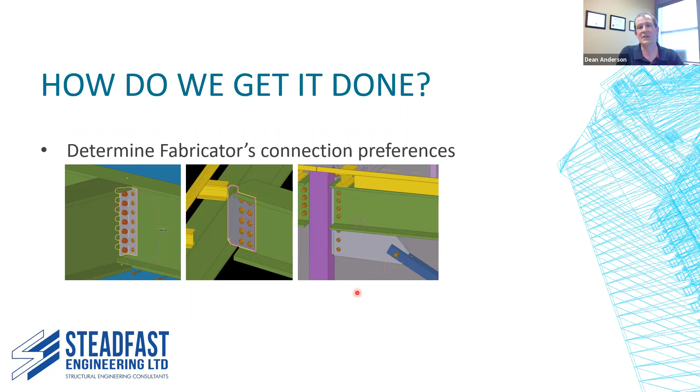They might not want to do that. They want to say, no, we don't want to weld in the field. We don't want to mess around with that. We want to maybe bolt it in the field. So they want to maybe do this connection where it's bolted.

So we talk to the fabricator, we figure out what they want. And then a lot of the time, we have to keep in mind what can actually be done with respect to the loading. If you're in an earthquake zone, if you're out in BC where earthquakes are a lot more prominent, you have to design the connections to resist those loads. This connection here that's welded would be much more suited to that type of situation.

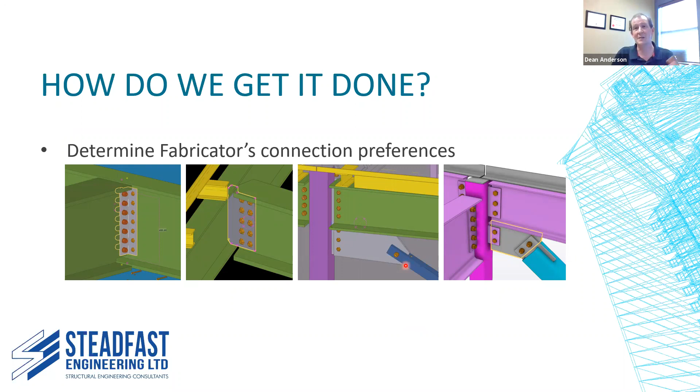So we have to balance all those things. We might have to go back to the fabricator and say, well, no, we can't really do this really small bolted connection. We have to make it a little bit bigger and beefier so that we can accommodate the loading. So we can have that back and forth to accommodate those sorts of things.

So then we design, we figure out what we have to design, we put it all together, and now we have to communicate that information to the detailer. Again, he's the one who's going to create that IKEA booklet, the assembly instructions for how the steel is made.

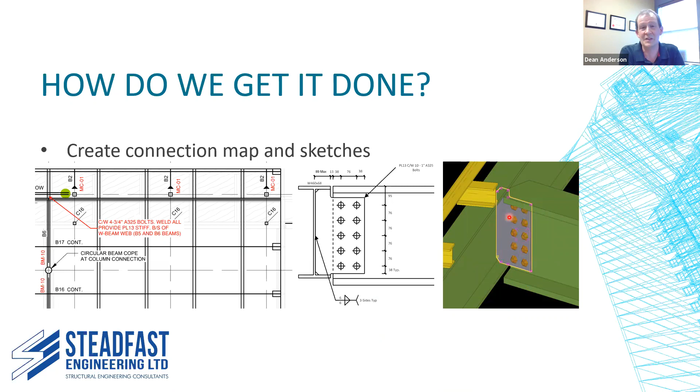He takes that onto the shop floor and he builds that piece. Then we go in and we've communicated to them our designs. They've created their model, they've created their two-dimensional shop drawings. And then we have to go back and make sure those drawings reflect the designs that we provided.

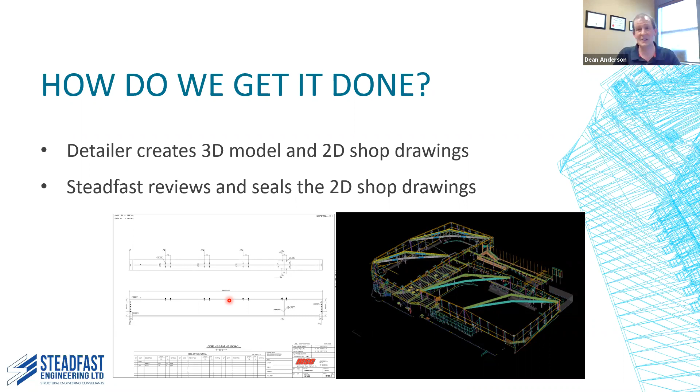So we go through and check all of these drawings. In the world where we have to take responsibility for our designs, these two-dimensional drawings are the things we sign and seal. We're saying that yes, these designs reflect what is designed according to code, what is safe. That's something Adam is going to talk about later, about how this may not be the most efficient way to do things, and hopefully there can be some improvement, but that's the way it's done right now. These two-dimensional drawings are kind of that legal document to say we designed this, and it's done according to code.

So now we're going to narrow down onto a particular connection. We were working on a project called the South Burnaby Ice Arena. This snapshot probably looks familiar from earlier, but this is a big zoom out of this project we were working on. To get an idea of scale, this is 2 hockey rinks along with seating, with bleachers on the side surrounding the rink. There's another one down over here with some other rooms and structure in between those 2 rinks. So that's the overall building.

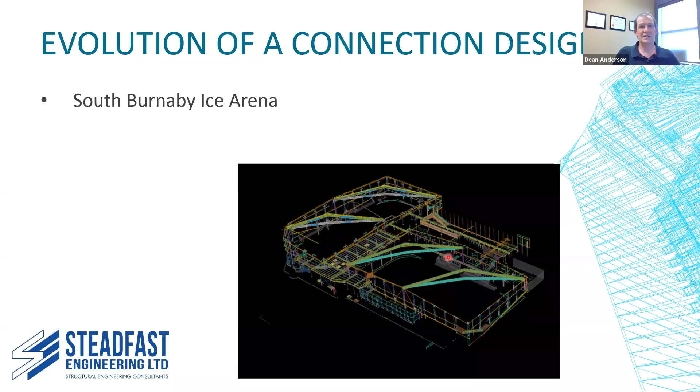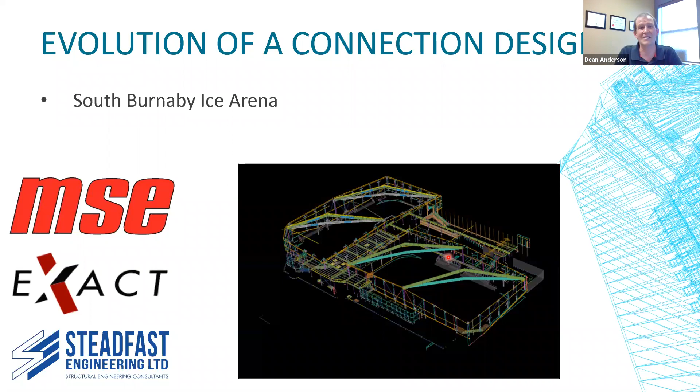We were working on this project with MSE, McDougall Steel Erectors, and they are the fabricator, the guys who are building the steel. They're located in Prince Edward Island. Exact Detailing is the detailer, located in Victoria with offices across Canada, their home office in Victoria. This really shows how the virtual world works and how we can work across the country to accomplish one project in one particular location. We're spanning across the whole width of Canada essentially in this one project, and it works really well. We have a lot of tools that can make this happen quite effectively.

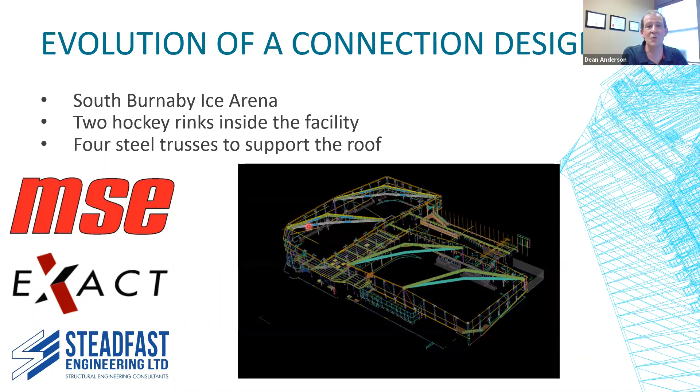So we've got 2 hockey rinks inside the facility, and what we're looking at is these triangular shapes here, 2 here and 2 down here. We're going to focus on one of these triangular shapes. Those are trusses. These trusses support the entire roof that clear spans over top of these rinks. They span diagonally, so they're extra long. And in between, hopefully I don't offend people at the steel center, is a wood structure. This is actually a hybrid steel wood structure, with a whole bunch of wood members spanning in between to make up the roof.

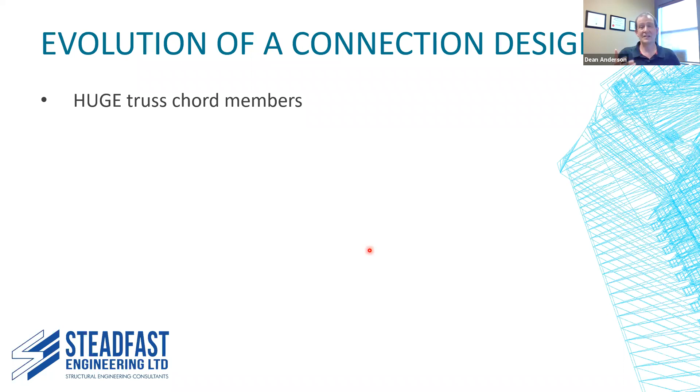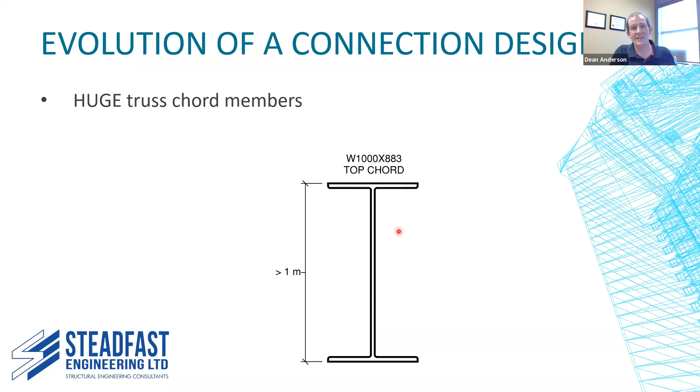So we're going to look at one of these trusses. Each member or each part of that truss is a huge chord member. These things span very far, so they're constructed from massive sections. The designation is a W1000 by 883 - meaning it's 1 meter tall, 1,000 millimeters, and weighs 883 kilograms per meter. It's quite large - to give an idea of scale, if you're a person standing beside this beam, it comes up probably roughly 2/3 up your body. So quite large, quite high.

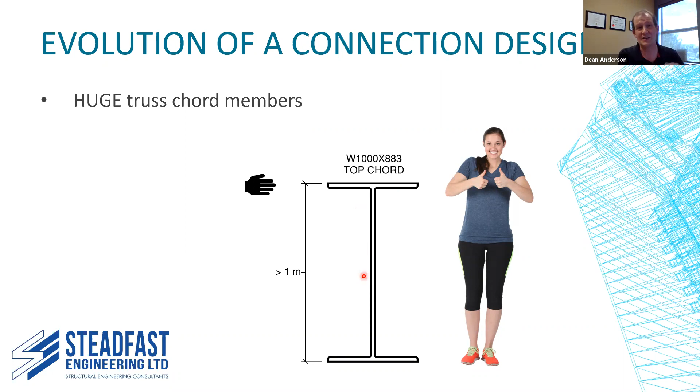If you look at one of the flanges - the horizontal parts of this wide flange shape - it's about 3 inches thick. If you hold up your hand and go from knuckle to knuckle, that's about 3 inches, that's how thick the steel is on the top and bottom flange. This web part here is about 2 inches. So it's a very thick, very heavy member that we had to deal with.

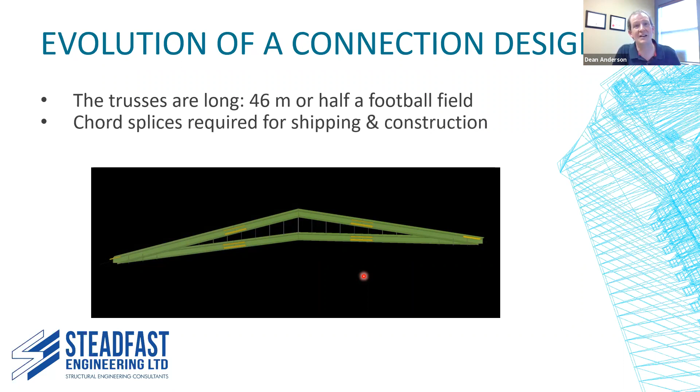How do you build this in your shop? How can you effectively put this together in your shop? You'd have to have a shop that's more than half a football field long just to accommodate that, so it's quite challenging. So what we figured is that you had to put splices in here. This is, again, talking with the fabricator about how we were going to do this.

So what we did was we figured that we needed to cut this truss into thirds. So we got 3 separate sections of truss. It's actually 4 because this top part is separate and that part is separate too. But we're basically cutting this truss into thirds, so we have to cut this.

So what we had to do was go back to the engineer of record. We have to say, okay, we want to cut this truss because it's too tough to get to site, too tough to actually put together. So give us the loads. We went back and forth a little bit with the engineer of record to come up with the best loads. Sometimes the tendency is to give really safe, really high loads. We had to go back and forth to try to get the best loads so we could design the best connection possible that's cost effective and can be built on site, can actually be accommodated.

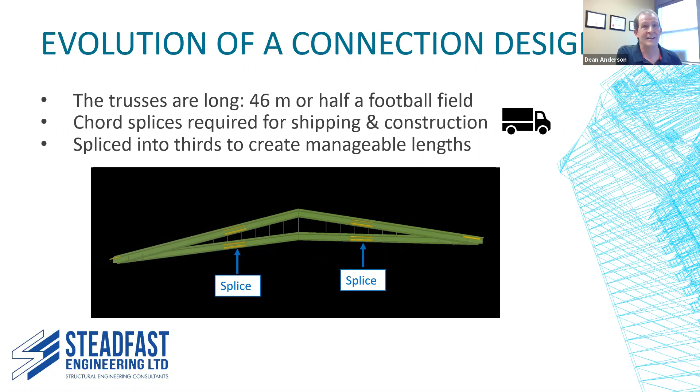So this is where we come in, this is where Steadfast comes in. There's a connection required at the splice. The engineers provided forces, we've got those, and these forces were actually quite large. We're looking at the bottom chord of a truss, so each truss consists of that 1 meter tall member.

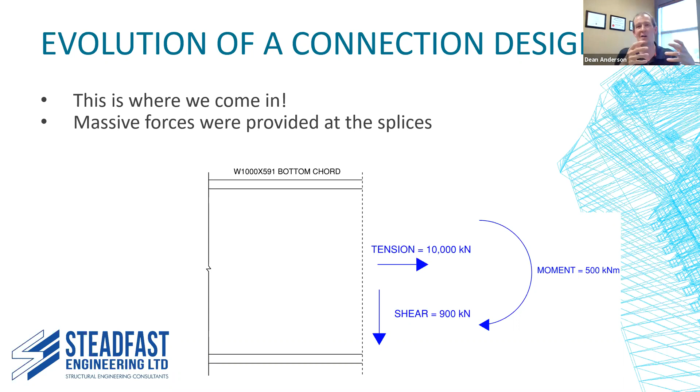Each truss had a tension load of 10,000 kilonewtons, a shear of 900 kilonewtons, and a moment of 500 kilonewton meters. To get a rough idea of how large that is, imagine 170 African bush elephants. That's roughly what 10,000 kilonewtons is. So if you were to hang 170 elephants off the end of this thing, that's how much force is coming through this truss. It's quite challenging to try to come up with a design that can accommodate these forces.

Again, we have to accommodate the loads, we have to accommodate the fabricator, we have to make sure it can be built on site, we have to make sure the architect is happy with the way it looks, and we have to balance all these things while trying to make this connection. So it's pretty challenging. At this point, I'm going to pass it over to Keenan. He was the guy that did most of the work on this particular connection, so he's going to discuss some of the first few designs that we worked on to try to figure out the best way to do this.

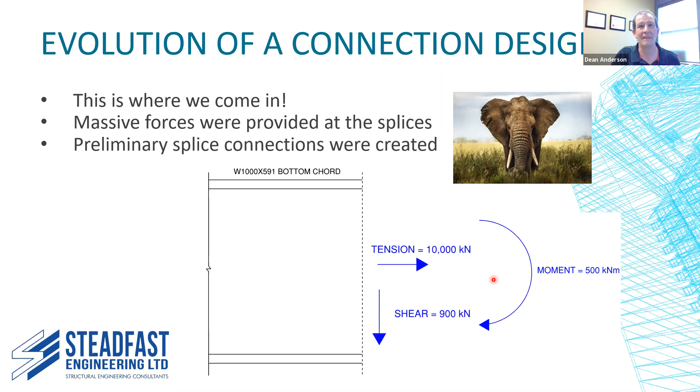Thanks, Dean. So now that we have these forces, we're tasked with the challenge of figuring out what can be done, what's possible here. These are massive loads that we're dealing with. So the first concept that we came up with was a flange plate connection.

In this configuration, we have plates on both sides of the flanges, as well as on both sides of the webs. The nice plus with this connection is that these plates are shipped loose to the site, and then they can be easily bolted up during construction. This is also great for the fabricator, because we don't have any welding involved here, not in the shop or in the field. So this is going to greatly reduce their labor costs.

One of the primary goals for the fabricator on this job was to avoid any field welding where possible. Field welding can be a challenging and costly process, as it's difficult to control the outdoor environment around the welder. So you end up with a higher risk of producing poor quality welds, which we don't want, and they don't want to have to rework those welds as a result. It's also more difficult for them to maneuver these pieces of the truss into place prior to welding on site, compared to doing this in the shop where all your cranes are accessible to you. So field welding could be done, but the erector wants to avoid this if we can.

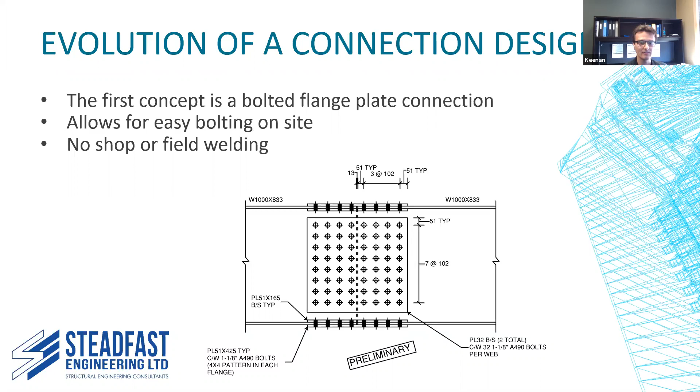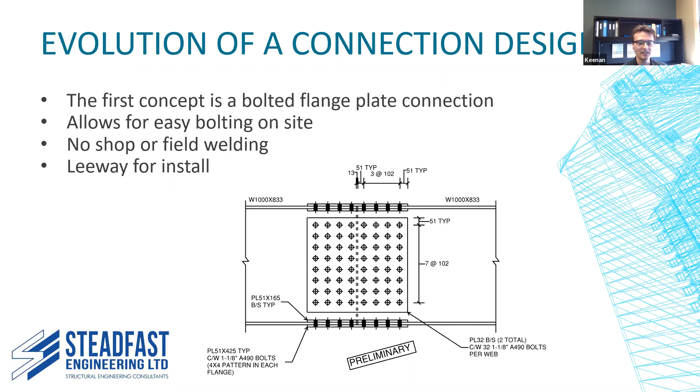Another plus with this is that the direction of the bolt holes allows for a small amount of adjustment in the field. These holes are drilled slightly larger than the bolts themselves, so when they go to piece this truss together on site, it provides a bit of leeway for everything to connect up. It also gives them an easier chance of meeting the tolerances when they go to plumb the building. So although we've seen a bunch of positives here, there are also some downsides to this connection, which we'll look at next.

Okay, so a few of the key drawbacks. The first issue encountered is that these thick flange plates that sit on top of our member are now clashing with the roof deck and the architectural finishes above this member. These flange plates are around 2 inches thick, which is quite significant, and they'll end up protruding more compared to a typical case where you have small forces to deal with.

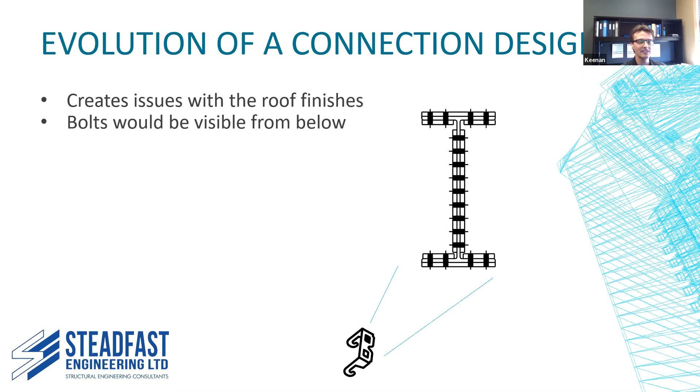Another issue that came up is that the bolts in the bottom flange of our member are going to be visible from below. These trusses are exposed to the inside of the arena, and the architect didn't want any bolts to be seen by the occupants. As an engineer, I like to think these bolts are really cool to look at, but beauty is in the eye of the beholder, and in this case it wasn't part of the architect's vision to see these bolts. So ultimately, for these few reasons, this flange plate connection had to be scrapped.

But luckily, there are some other possibilities, and we'll take a look at another one next.

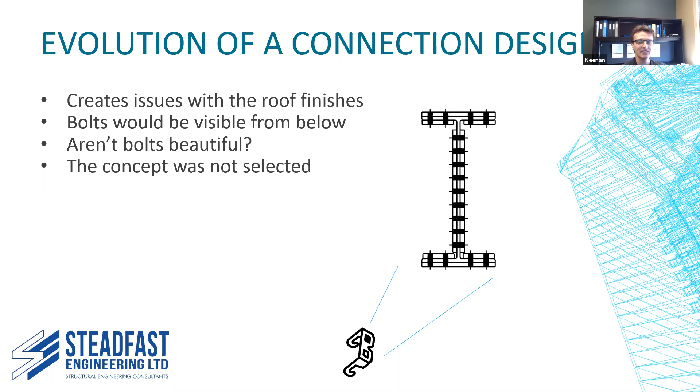Okay, so the second concept we came up with was an end plate style connection. Similar to that first flange plate option, this is going to allow everything to be bolted on site and avoids that pesky field welding.

This configuration is a little different though, in that we now have an end plate welded to each segment of the truss chords, and we also have a series of stiffeners that are required. You can see these stiffeners in the web of the member here. What these stiffeners are doing is strengthening the plate, and allowing the forces to be transferred effectively to the bolts without causing a lot of prying action on the bolts, which would reduce the strength you can get out of them.

So what are the main advantages with this concept? Well, first, since the bolts are shared between the two sides of the splice, a smaller amount of bolts are required overall compared to that first flange plate option. In that first option, we had an independent group of bolts on each side of the connection, so overall you'd end up with more bolts.

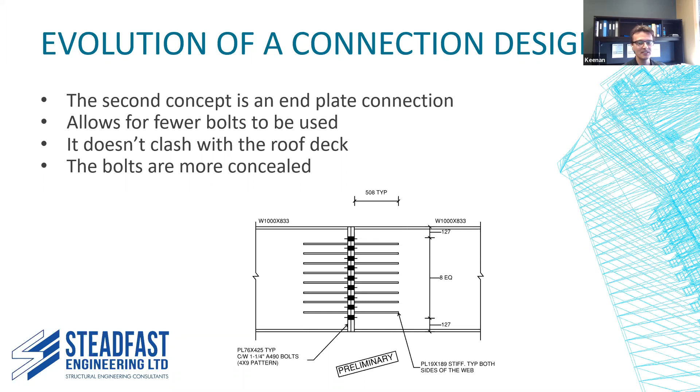The second key advantage is that we don't have plates above the truss anymore, so we're not going to have that clash that was occurring with the roof deck or architectural finishes above. There's also an improved aesthetic with this look. Now the bolts are more concealed since they're above the bottom flange of the beam, and they're not going to be as easily spotted by viewers from below. With those few improvements, it seemed like we were going in the right direction, but there were some other issues that arose, and we'll take a look at those now.

The first downside with this concept is the amount of welding involved. Each of these end plates and each of these stiffeners need to be welded to the chord segments. Although this is all done in the shop, it's still going to add a lot of work for our fabricator. The size of these welds is quite large, and they require multiple passes by a welder, so you have to go back and forth over the length of this weld to complete it.

Another downside with this concept is that we now have to pre-tension the bolts. With this configuration, the bolts are resisting tensile loads and shear loads rather than only shear loads, which was the case with our earlier flange plate option. Pre-tensioning is required in S16, the Canadian standard, and this reduces prying action that can occur on the bolts. It also decreases the stress range that occurs in the bolts.

This is all great from our perspective as engineers, but it's a different story for the guys on site. Now the erector has to do more work. Each of these bolts has to be tightened to a correct level of pre-tension, so it's going to take more time for them to go through each bolt and tighten it up the right amount.

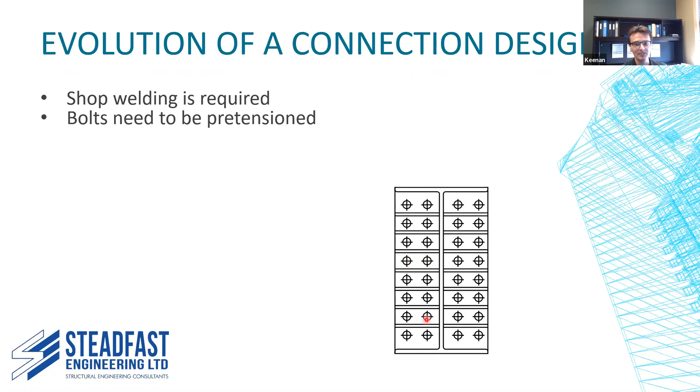And then there's one final downside that ended up occurring with this concept, and it's another architecturally driven issue. Between the flanges of the truss chords, they want to run a sprinkler line along the entire length of the truss. This meant that at these splice points, they need to somehow pass the sprinkler line through, so they want to cut a 6-inch diameter hole through the end plates.

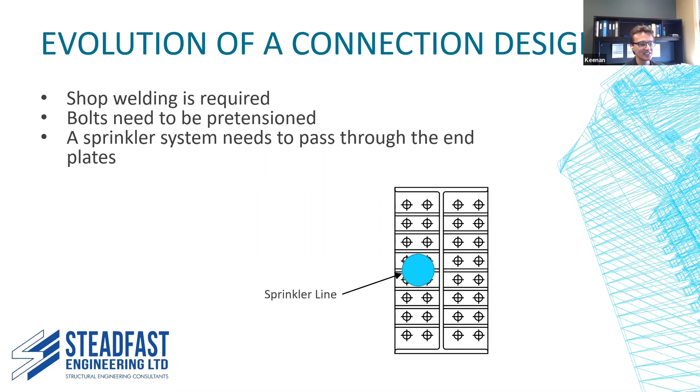As you can see in our picture here, that's a large amount of material from our end plate. For strength concerns, this wasn't going to work. So once again, we had to go back to the drawing board and come up with new ideas.

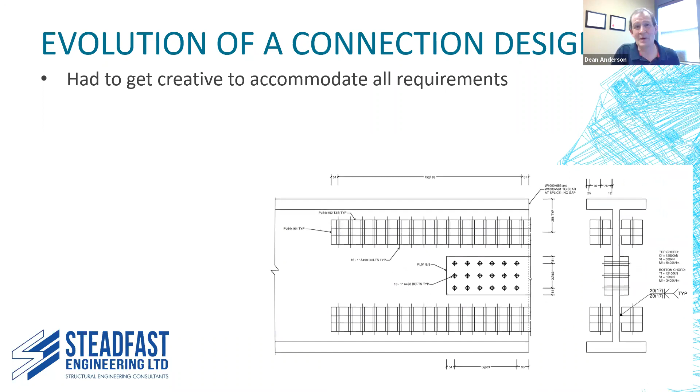We were pretty challenged. Those were our top two designs that we wanted to use, but we had to get a little more creative and figure out something that could satisfy all of these requirements. So what we came up with was a built-up flange plate connection.

We had to make sure we didn't have anything on top of the beam, so there was room for the sprinkler line. We ended up welding a plate that went across and bolting that plate together. We had enough space for the sprinkler line, so it satisfied that requirement, and it satisfied the loads. We'll look at that later, about how we accommodated all the loads.

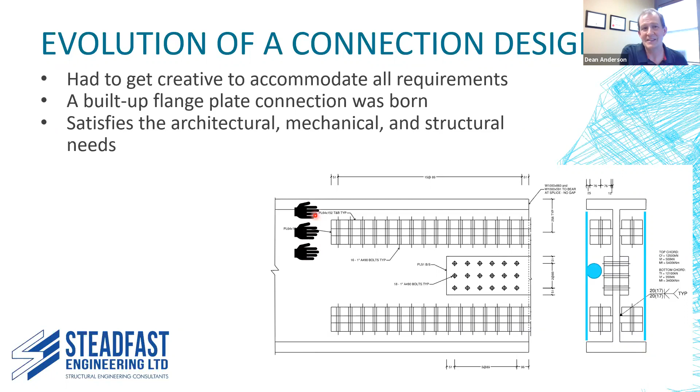Another way to understand how big this is: if you imagine these plates across here, they were 2.5 inches thick each. If you hold up your hand and go 3 knuckles, that's about 2.5 inches, so we've got about 2.25 hands thick. I couldn't draw that on the slide, but that's what it represents. It's very large, very thick, with a lot of very high strength bolts in there.

That's a 3D version of the connection in the model. It shows how we have these plates welded to each member, and then these yellow plates span across to create that splice connection in the middle, accommodating the shear force and also some tension force.

So how does this connection work overall? This is for the engineers listening, which is probably most of you. We had to accommodate the shear, the tension, and the moment, and make sure we could resist these forces. Here's a breakdown of how we broke those forces up.

We have the shear force, resisted primarily by this web plate, or two web plates, one on each side. The tension force we broke up into 3 components based on the cross-sectional area of the connection plates at the top and bottom, and also the cross-sectional area of the connection in the middle. We split our tension force, 170 kips, into those 3 components.

Then the moment we split into a couple. We designed this so the bottom flange is bearing in compression - these two beams have to be touching, they have to have that bearing at the bottom flange. So at the bottom flange they bear, putting the compression moment there, and then we had the other couple from the moment split into tension at the top flange.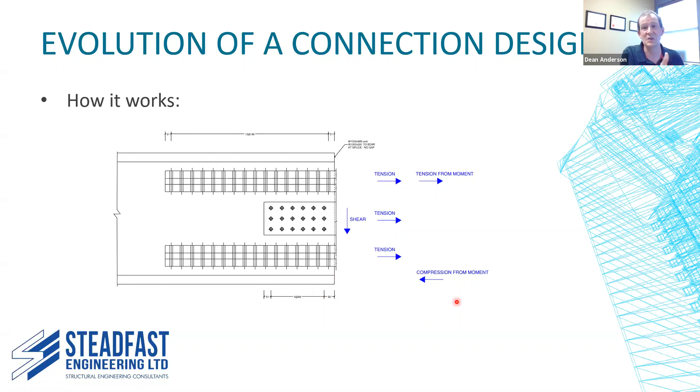So we sum all of those things up. This top flange connection has to resist both of these tensions added together. This web plate connection has to resist this shear and tension combined, that force also in the bolts and the plate. That's how we broke up the forces in this connection and made sure it was designed appropriately to resist those things and satisfy all of the other people involved.

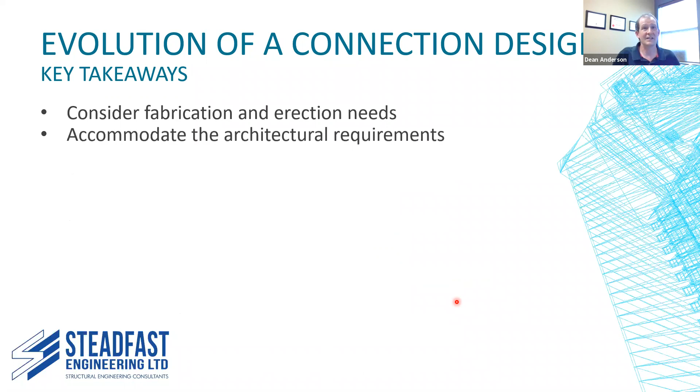So some key takeaways from this: we had to balance the needs of everyone. The architect was concerned with how it looked - he didn't want to see those bolts, he wanted everything hidden. The mechanical guy wanted the sprinkler line to go through the connection, so we had to accommodate that. And the engineers, including us, don't want it to fall down.

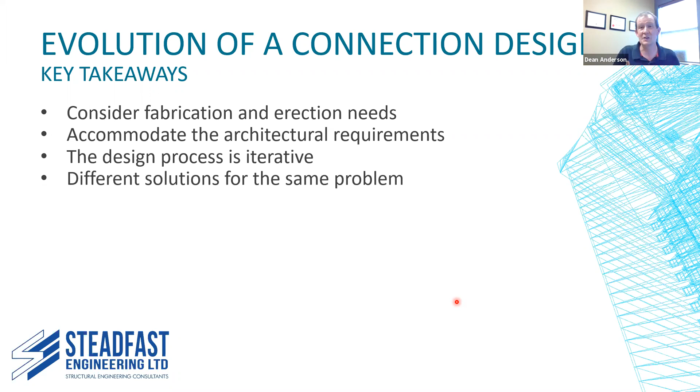Probably just about everybody else in that ice rink doesn't want that to fall down either, so we had to make sure it's strong enough. It took several iterations, we had to go through this process several times. It's not simply what I thought in school when I was in engineering class, imagining they're just going to give me these numbers and it's going to be like an assignment - I figure it out and I'm done, finished. It's not that way. You have to keep going over and over to come up with different solutions to the same problem so you can accommodate everybody. There's many different pros and cons of each solution, and this solution here appeared to satisfy everybody, so we're pretty happy that it actually worked.

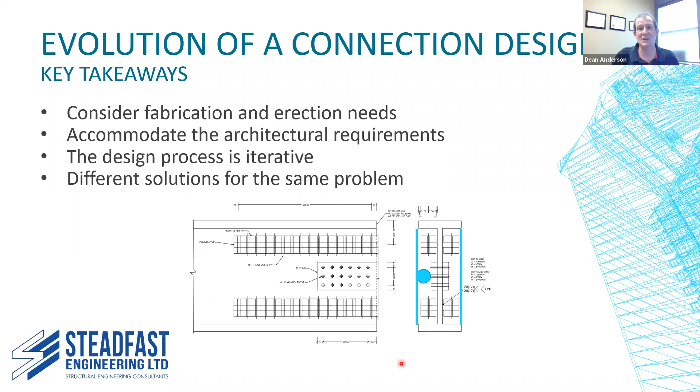So evolving into the future, we're going to go to Adam now, and he's going to talk a little bit about what we can look forward to with respect to connection design and that process in the future. Again, there's lots of things that we do right now that are not as efficient as they could be - we maybe don't have the technology available to us yet. So I'll hand it over to Adam, and he can talk a little bit about evolving into the future.

Thanks, Dean. So yeah, I guess the first idea we're going to discuss is how engineering designs and construction information in general are provided between companies. As Dean mentioned earlier, currently it's a 2D, 3D cycle that appears to have some steps that can be improved. The typical process for a building usually follows these steps.

First, the engineer of record, or EOR, creates a 3D model to analyze and design the members of the building. Then with this nice 3D model, he decides to compress it down to 2D structural drawings with plan views, elevations, and details, attempting to capture everything from the 3D model, which is obviously hard to do. So usually small items will get missed, which ends up causing extra time in the future.

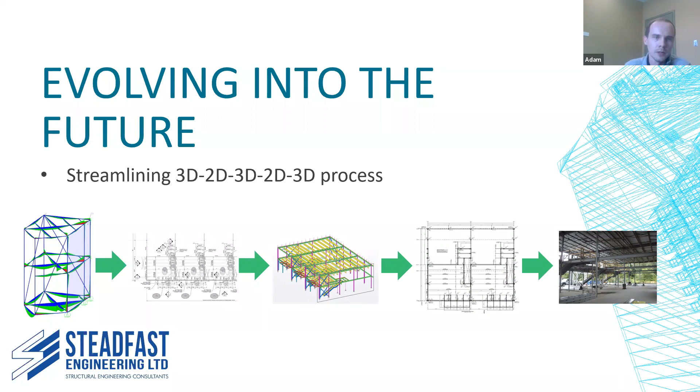So one option that we see potentially helping to reduce this wasted time and lower missing information is for engineers to stamp 3D models themselves instead of converting it to 2D drawings, because 3D models better capture everything as it is. It's going to be a 3D structure in the end, so why would you not stamp the 3D model? That's kind of our thinking behind it.

But obviously there would be some complications, as there will need to be a way to capture everything required, such as weld symbols, general notes, design loads - but it shouldn't be too difficult to add this into the model. It's already becoming more common for engineers to send an export of their model for comparison to aid the fabricators, but it still seems like you could improve this to the point where 2D drawings could be completely eliminated eventually.

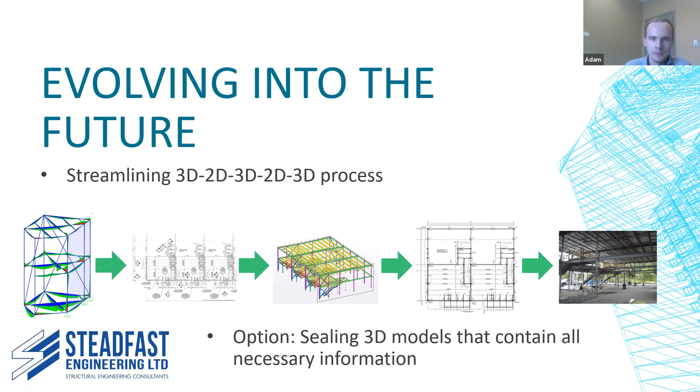Yeah, so we'll see. Hopefully things will trend that way eventually. We had sent a query to APEGA actually about this, and they seemed open to the possibility of it.

Yeah, so our next topic is looking specifically at connection design. The future likely includes some sort of computational design or artificial intelligence, machine learning. And this could also be integrated within the fabricator's 3D modeling software, like an auto-connect type of feature. So computational and AI connection design will hopefully be able to analyze connection points and create the most efficient method of connecting them based off of parameters input by engineers, fabricators, or erectors.

And this could result in maximized efficiency in plate shapes and sizes, bolts, and number of welds.